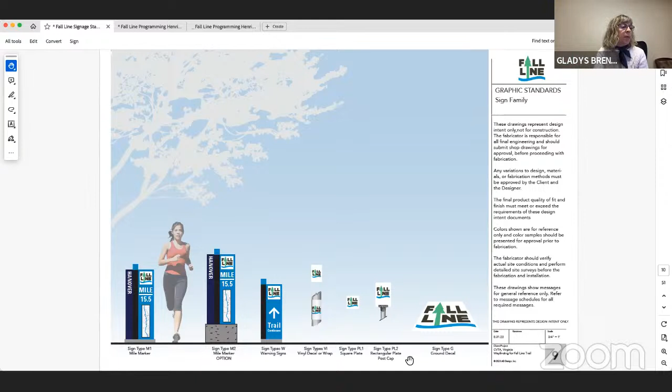The square plates probably are going to be metallic plates. These can also be foam core temporary signs. Basically, in the general specifications, we give some options. Then a rectangular plate that can act as a post cap, so we can use that one as well.

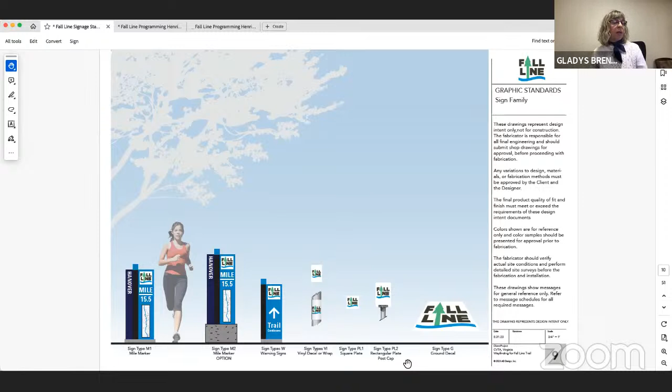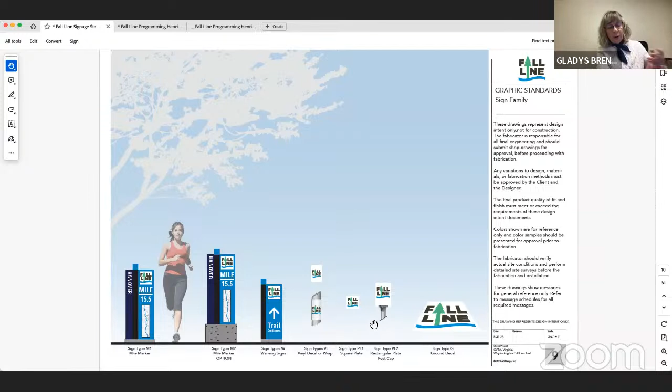And then the ground decal, when we get into the specifications, there are multiple options, as Mr. Tyndall proposed different materials and different elements to address any decal or any ground element that we can include in the trail, including branded crosswalks, which when we get into the Henrico section, I would like to address.

So then these parts of the manual, I'm going to go through quickly. I think the information was distributed, and if you want to look at it in more detail, you can, but basically the sign drawings include each sign type. It shows all the sizes, the letter size, the arrow size. Then this section shows the materials that are going to be used.

This is a side view. This is a back view. So if the sign is double-sided, because it's cantilevered, on one side you will see the main body of the sign pointing one direction, and then the reverse. And this is the top view.

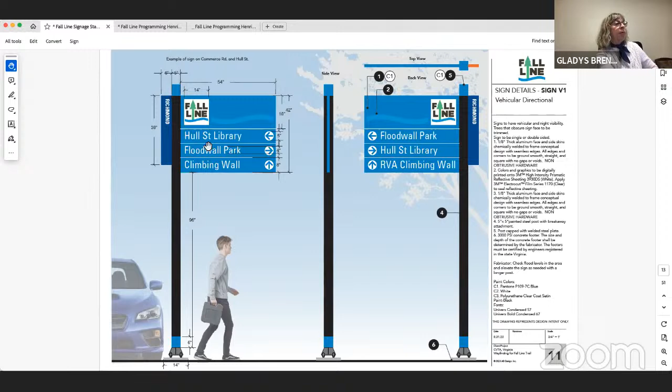This applies the same to all the sign types: sizes, materials, side view, top view, front view, back view. This one shows a little bit what we are proposing, the specific buckle, and we provide information as to where to get those, the websites.

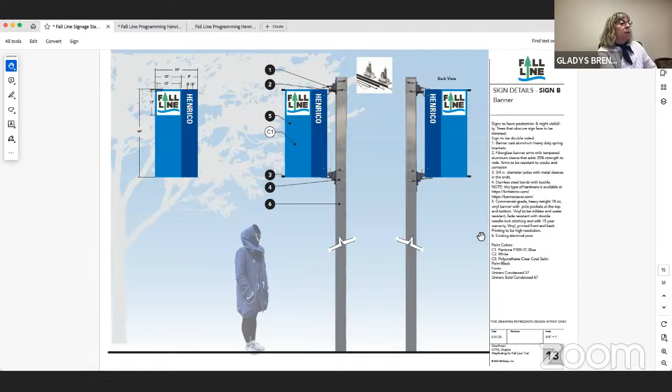Mark, can I interrupt for a second? Yes, sure. Just right here on this view, on the top view, to the right - well, actually, if you go back a couple of slides, maybe it was a typo. So to the right, it's orange, but should it be green? Yes. Okay, just a typo. Yes, a couple slides had the wrong color.

No biggie. Well, as you know, we discussed the colors and they changed. There were several iterations. These drawings were created with the former version of the color, so when we updated, probably we skipped some of them. I will make a note to make sure we are using the correct colors.

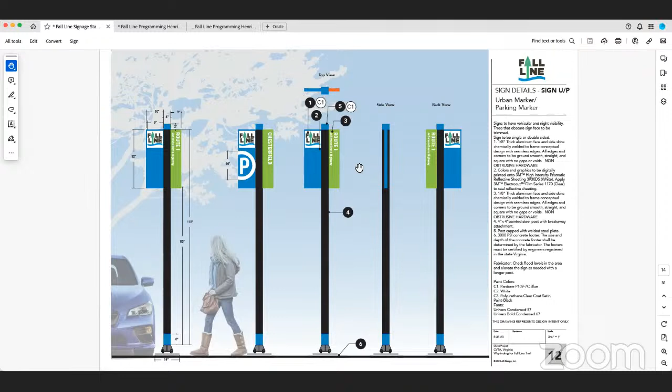Can I follow up with another? I hate to interrupt the flow, but those panels look fairly thick - what is the thickness? One eighth inch. But that doesn't really scale to one eighth inch, that looks like more. No, the one eighth inch is the thickness of the aluminum, but those details are at the end of this drawing.

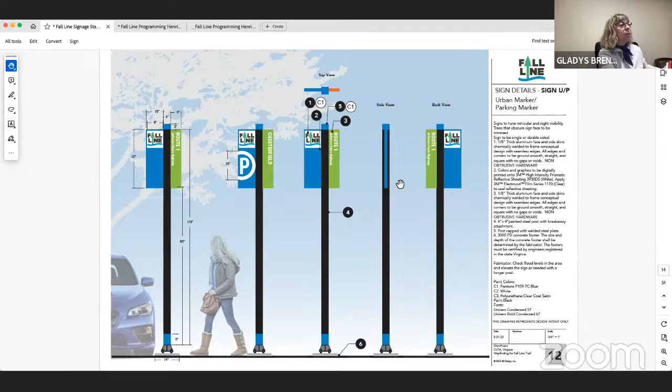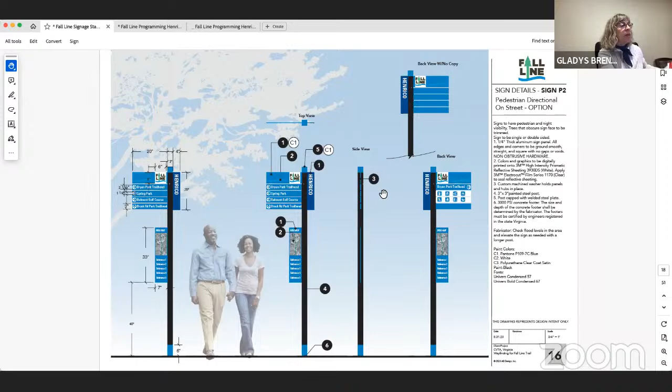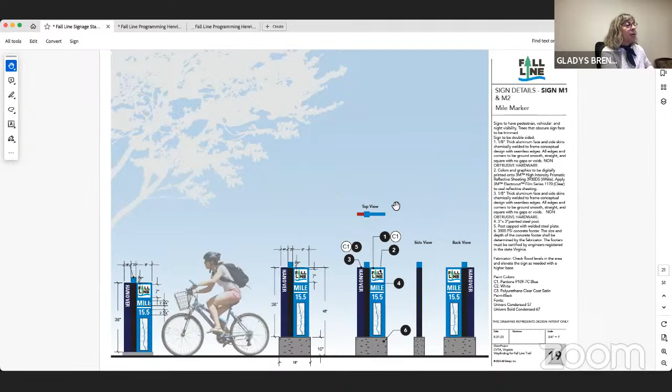Okay, bear with me a little longer, because there are basically two ways that the signs are constructed. If we could advance - this shows... so you see, this one is one of the options. This one also, we've forgotten on all the top views to change the colors on some of them. And this one too.

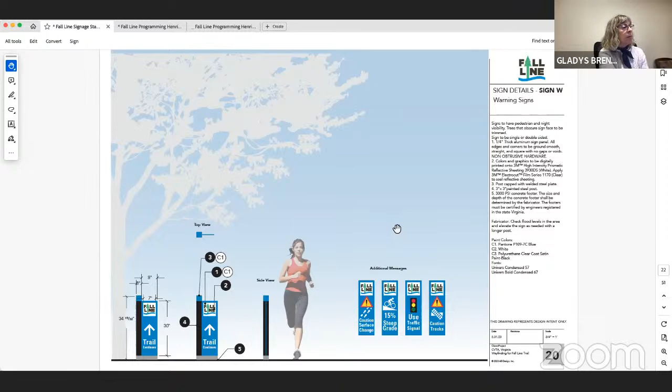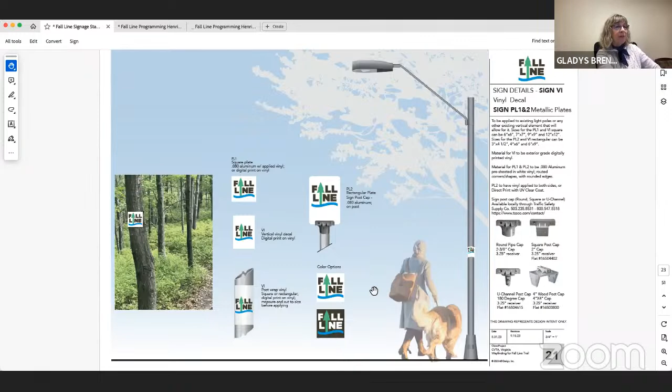These are samples of the usage. I don't know if I saw in the standards that there's a reverse version of the logotype, so I don't know if that's something we are interested in exploring. I was thinking, for any ground signs, because the background is white and they are going to be walked upon and rode upon, we may consider reversing the logotype or not. But in any case, let's see.

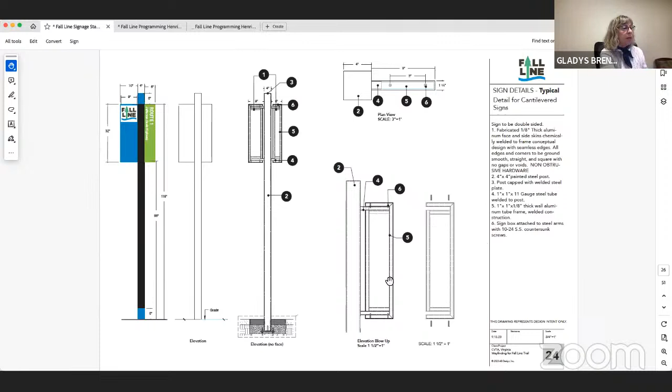Because the signs are cantilevered, most of the signs, except for one of the pedestrian signs, the sign is a box. So the 1/8 inch aluminum actually forms the box, and then the box has a structure where the aluminum is applied to. What you see here, the little hand pointing, is sort of a frame for the sign. That frame is attached to the post, and then it's covered by the aluminum face.

I'm just showing this. This is the thinnest sign, actually, but most of the others are the larger signs. Because they are cantilevered, that means they have only one post to the side to ensure that they don't collapse due to weight. When we discussed it with our manufacturing consultant, that's what they advised. This is also how the signs in the city of Richmond are, they are also cantilevered, and all of them have this frame structure.

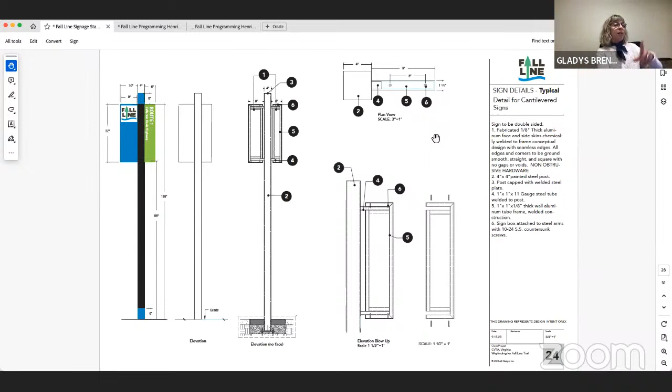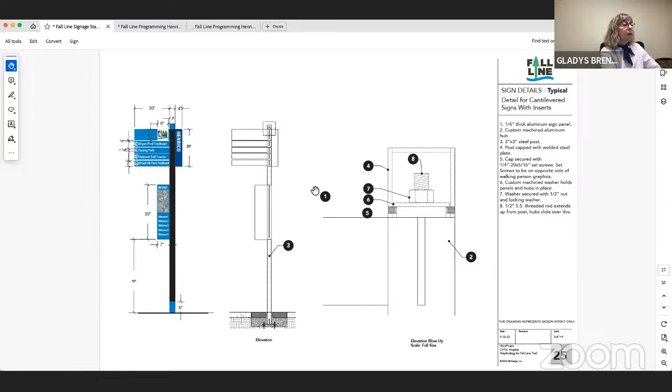In terms of the breakaway, every vehicular sign, or every sign located close to an artery where cars drive and can hit the sign, we are going to be using the breakaway. And then this will be a typical base for a sign that is not located in proximity to driving vehicles. And this is pretty much the overall drawings for the master plan, the standards we are going to be using. So, if there are any questions.

Gladys, this is... Yes, Barb. Can dimensions be added to the detail for the pedestrian sign base? You mean this one? No, the one you were just at. Go where you were, like the depth.

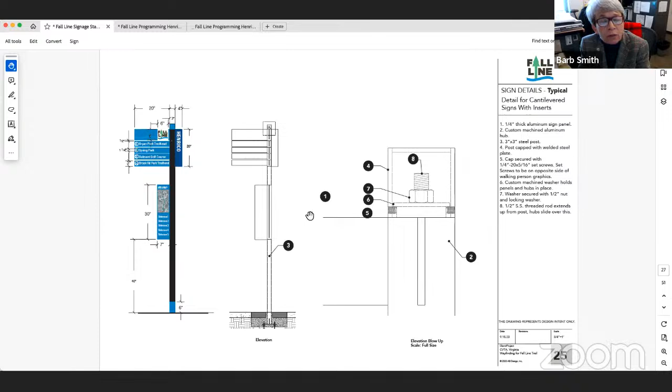Go advance a couple slides. Go to like slide 29. Oh, okay, nope, 27, sorry. I think it's 26. Are you talking about these numbers or? Yes, okay, yes.

Can you add dimensions to that? You mean to these? Like, how deep is this? Oh, it says 14-inch cover to cover, 12-inch footer.

We usually don't include the dimensioning of the bases, that's left to the sign manufacturer. We're just telling them it has to be concrete. You can't just put a post on the ground or they will fall. We had experience with other existing signs from other clients where they didn't use concrete and the sign sways all the time. So that's what we are telling the manufacturer, you need to use concrete. Then when they do the shop drawings, they have their engineers stamp the structural elements that apply to the signs, and they are the ones that have all the dimensions of those bases.

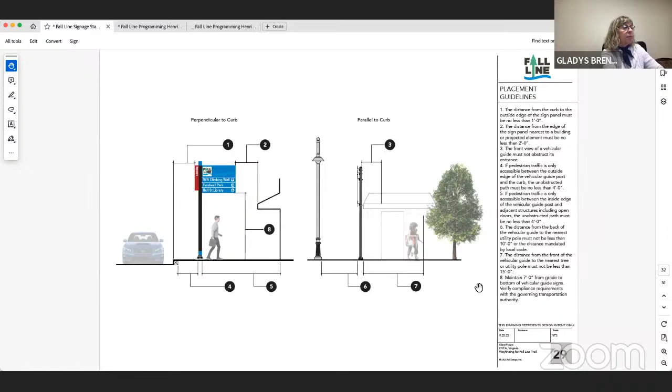And then we go to the placement guidelines. I'm not going to go through them because it's very boring and you have the document, you can read them. But can I interrupt you for a second, Gladys?

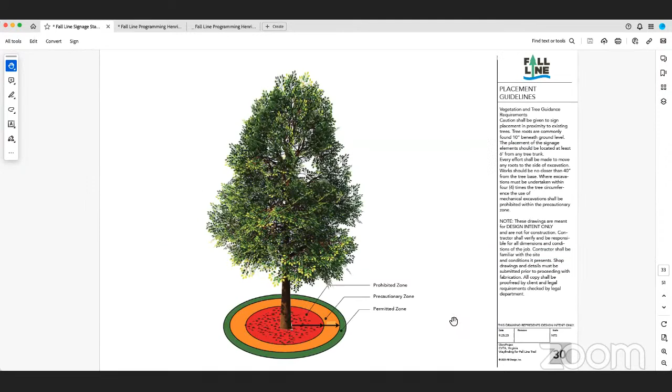Yes, sure, Joe has a question. Yeah, can we go back to the previous slides that had the placement? That one, and I guess the previous one as well.

So, and I apologize, maybe all my answers are buried in here if I would have looked at this in detail beforehand. But what is the basis for these dimensions, or what standard are you referencing when you say this is what we're recommending, distance from the edge of pavement, distance from walkways and so forth for the placement of posts and so forth? What standards are you referring to?

Well, these are general standards. These are sort of common sense viewing standards, safety standards. It's a combination. It's not any particular DOT from any part of the country standards. These are things that we've been using on all our projects, but they don't follow any particular set of standards.

So sometimes we look at the traffic control devices, but then again, these are generalities, because once you go to the particular site, there may be a tree that has roots that even if you want to put it at a certain distance, you have to remove it, put it further out because there's a risk. Or if there are particular instances, for example, a tree that is in front of the proposed sign, and maybe the tree is not in good condition, and the city or county decides that they can remove it or move it somewhere else. So, as I said, this is just a manual and guidance.

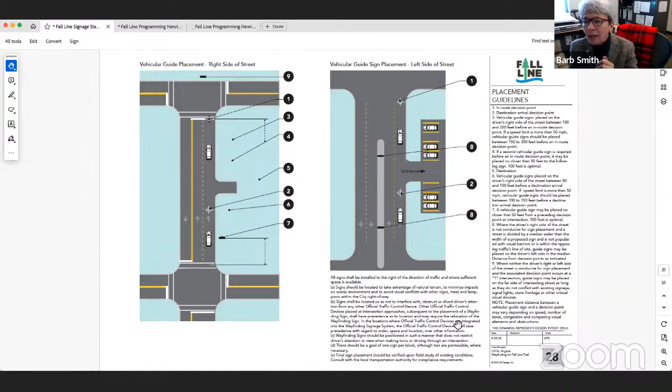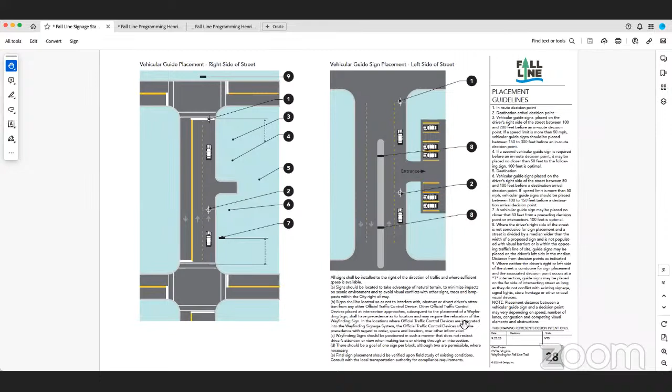Todd, do you have a question still, or are you good? No, I have a question, and actually I like your suggestion, Barb. So my question is under the sign drawing section, which is earlier, you specify, depending on which sign and size and so forth, a 5x5 painted steel post with breakaway attachment, or 3x3 painted steel post, or 4x4 painted steel post. Do you have any specifications in here regarding the steel post and the type of paint and so forth? If so, I missed it, but I haven't reviewed it thoroughly yet.

No, what I mean is that in terms of the breakaway, in terms of the base, all those details are handled by the sign fabricator. There are different brands of breakaway, and they will have to show that on the shop drawings. On all the drawings, it says this drawing represents design intent only.

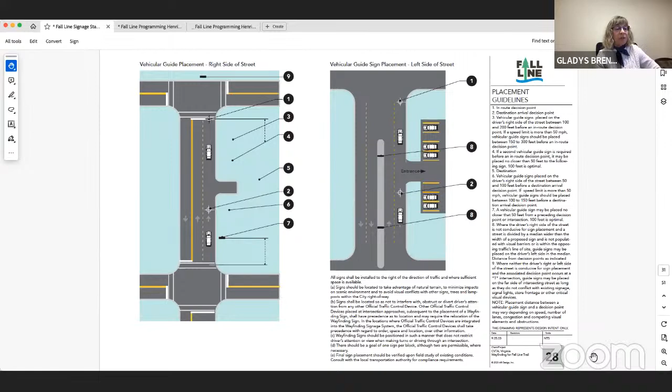Ah, that means design intent. Yeah, thanks. That means that none of these elements are going to be used to fabricate the signs. These are guidelines so that when you go out to bid these, everybody has the same specifications and they provide the same product. But all the details, we typically do not develop that level of detail as to what's the thickness of the post. That's on the general guidelines. If the post is 4x4, 1/8 inch aluminum or steel or whatever it is, it will still keep being that when it comes to the end of the post. I mean, there's no variation. The size of these bolts and screws we don't provide.

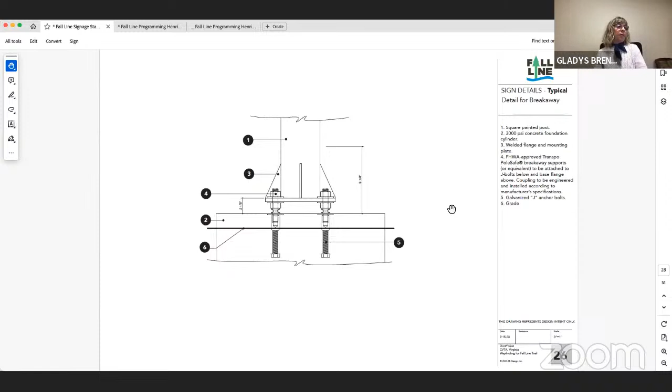Typically, these are, for example, Transpo PoleSafe, a brand of breakaway, and they have all the specifications for that particular brand on their website. We're getting to understand that the shop drawings are really what has a lot of the detail.

Chet, do you have a question? More of a comment. If you look in the back of this document, starting on page 30 through, there's a description of the standards and how they should be applied. Page 33 actually references MUTCD and VDOT standards. So I think some of the questions are addressed, but we just haven't gotten there yet.

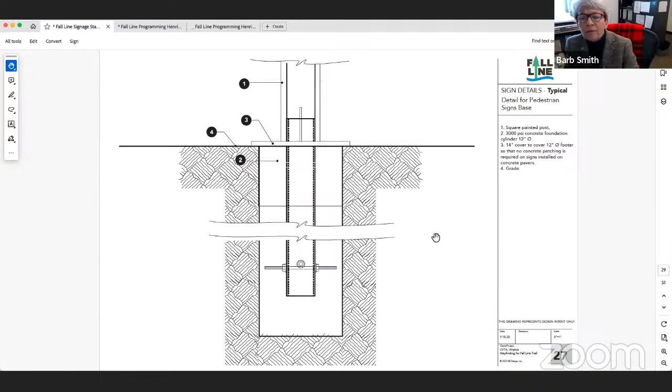Okay, that's good. Naomi? Yes, thank you. Could y'all go back to one of the images that has Petersburg on one of the signs? It's an orangey yellow color.

We had a very fun email chain where we tried to determine what color we were going to go for, whether blue or yellow, and we settled on yellow. This color looks different from the one we had been emailing about. I have it on my screen if you want me to share or just send it to you all. Maybe it's because of contrast that was needed, but let me know if we can get this more on the yellow side we talked about instead of the orange side.

Well, first of all, colors on the screen are never correct because it's color through pixels of light. Usually we define them by the Pantone books, and typically they'll have to provide a sample of the painted material. What you're saying about the yellow, yes, there are contrast issues. We never use the one you'd call yellow - we usually define it as mustard or gold, and it tends to have a little bit more red and lean toward orange.

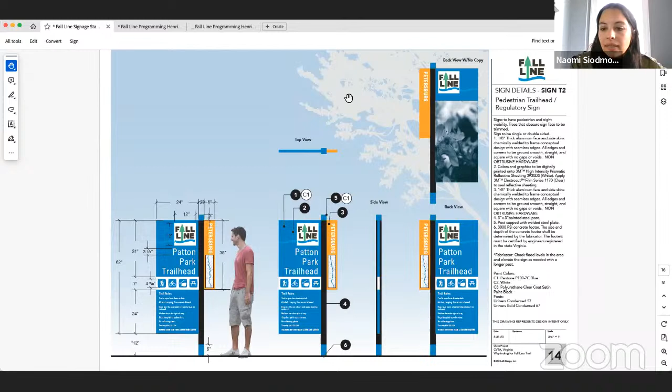I was also curious, so with these guidelines, is there any funding in mind already for implementation, or is it up to the jurisdiction to identify funding and implement this wayfinding signage? I'm going to let Chet address that - I know he's been talking to Dorona about funding, so I might not be as up to date on that.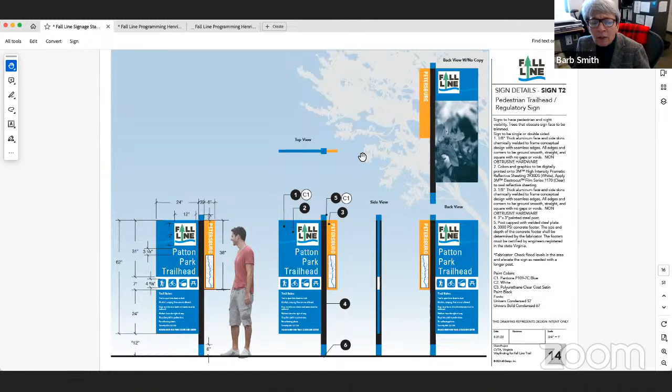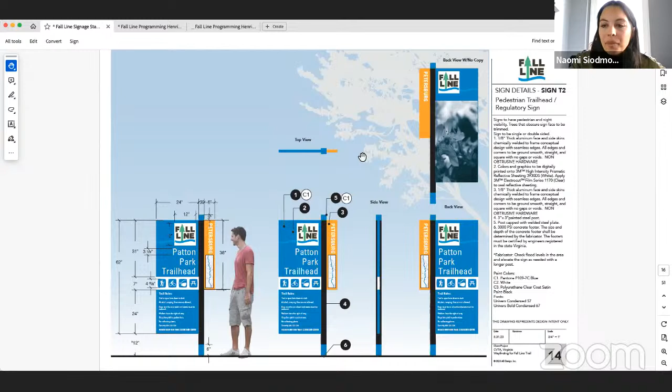Yeah, the funding is not covered as of yet, but we're looking at multiple options, either applying for grants to cover that kind of cost, or partnering with other organizations to make it happen. Great, thanks - let us know if we need to start making initiatives on our own, or if you all are going to keep taking the lead on this to help us implement and fund it. Just let us know if we need to start looking for opportunities as well.

Yeah, thanks, and Brantley just put in the chat - TAP funds are a good source for that. Ron's on the call too. CMAQ is also an option, I think. Oh nice, that sounds good. Appreciate it, thanks.

Okay, thanks Gladys, we hijacked your presentation, but I think we're back on track. No, not a problem - I really like the interaction and feedback. It helps us improve and include things we might not have thought about. So feel free to interrupt anytime, because I appreciate it being interactive. Anyway, I was saying this signage master plan, as I said, it's a lot of pages with text.

Basically, it explains content standards, location standards, Fall Line Trail anatomy, recommendations for message content, orientations for the directional signs, the nomenclature and standards. This was from the draft that we received. The circulation theory, the signage categories, the usage criteria for each of the different signs.